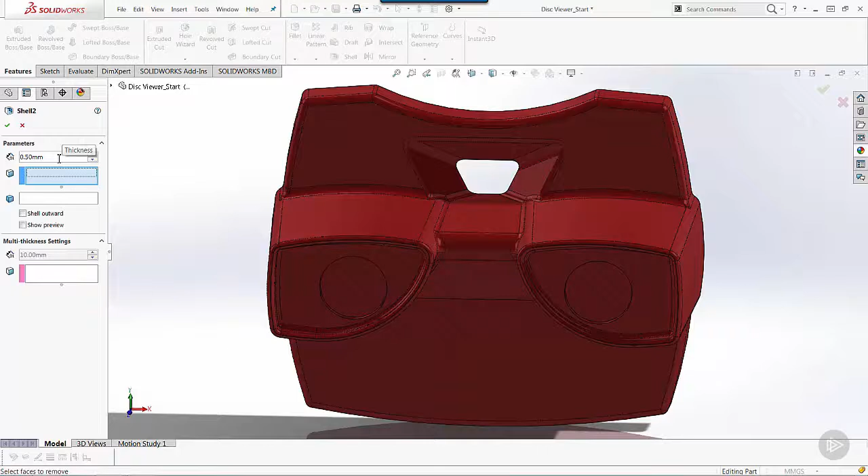Any faces that we select in this box are going to be removed, and then the wall thickness is applied. We do have the ability to set multiple thicknesses, meaning that we can specify individual faces and determine their thickness individually. But we want to stay with our standard half millimeter thickness, and we want to specify that these two faces are removed, and then the entire back face is to be removed.

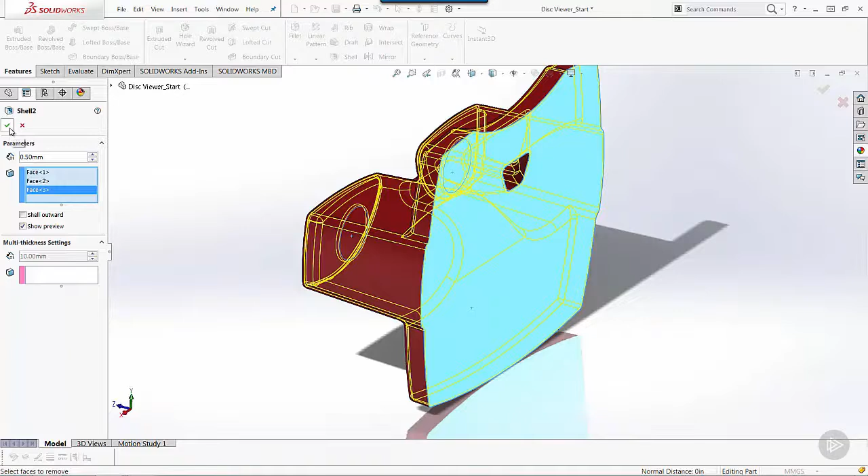We can choose the show preview. It's going to do a little calculation, and whenever we see our yellow preview, that lets us know that we're going to be able to get a result out of that. If you don't see the preview, it means you've probably got something too thick. Fillets are not quite large enough. There's something that needs to be modified in order for that to work.

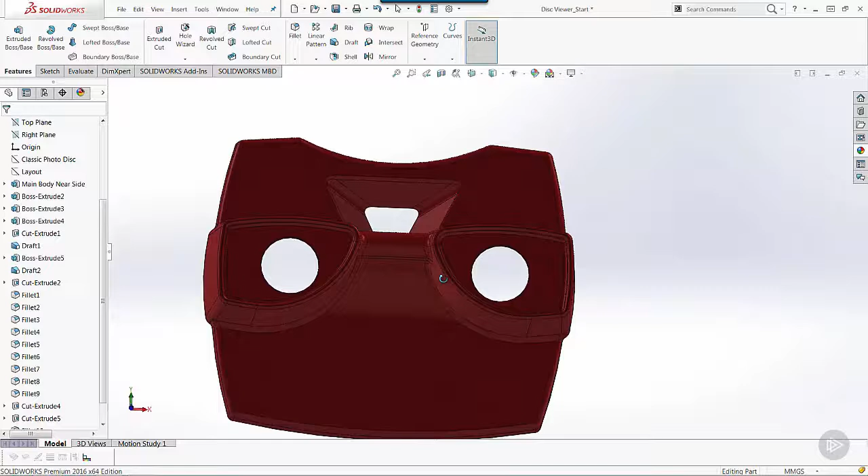And you can see very quickly I'm able to take that geometry and hollow that out or shell our surface in order to give us the plastic injection molding shape that we want. Very, very cool feature, but you do have to have pretty clean geometry. You can have problems with having surfaces that intersect one another and don't allow for that offset. It's basically an offset of all those surfaces that we did not select.

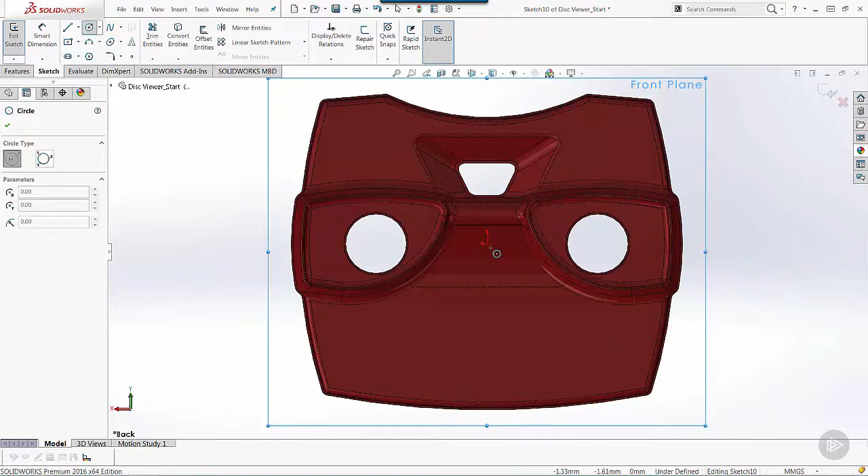Now that we've got that, I want to come in to the back view. Use Control 2 to get to a back. I want to sketch in a circle that's going to be a mounting area for our slider or our advancer that's part of that disc viewer. And so right there on the front plane, I want to create a circle right at the origin. Give that a dimension of 20 millimeters. And then I'm going to do an extrusion on that.

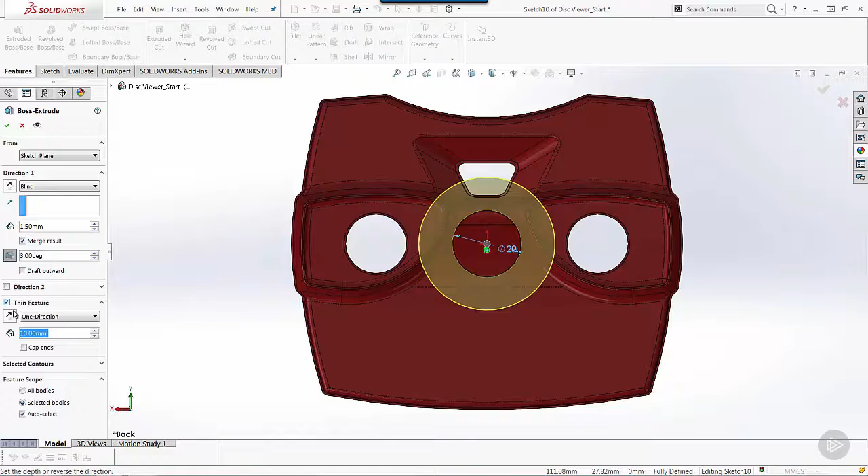We want to set our extrusion draft at 3 degrees. And then I want to specify this to be a thin feature, and I'm going to give that our same half millimeter thickness. Make sure that it's extruding in the right direction. And I'm going to use the up to next extrusion end condition, and that'll allow that to go and blend in where we need it to be. We also can choose the draft outward, which is going to allow it to create exactly the feature that we need.

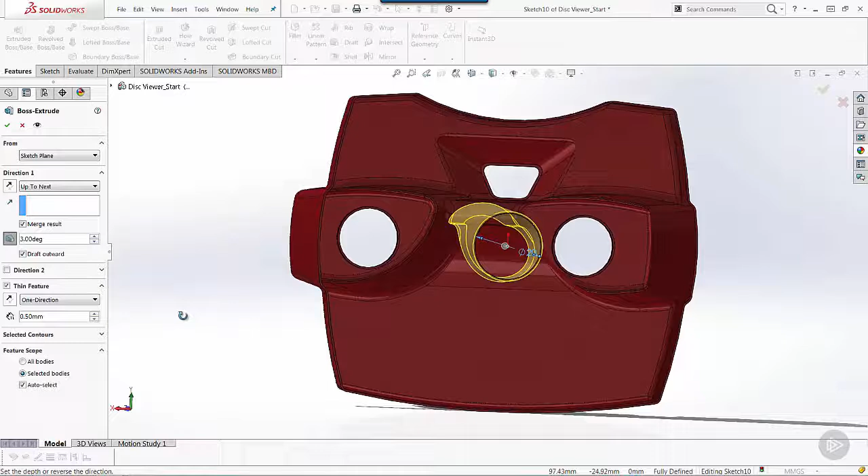So now you can see I get a little circular boss that's in there that starts at a half millimeter, and gets thicker as it goes. If you know anything about plastics or SolidWorks Plastics, we might need to run an analysis on this, but because of that 3 degrees, it's going to get pretty thick down there right as it hits the bridge.

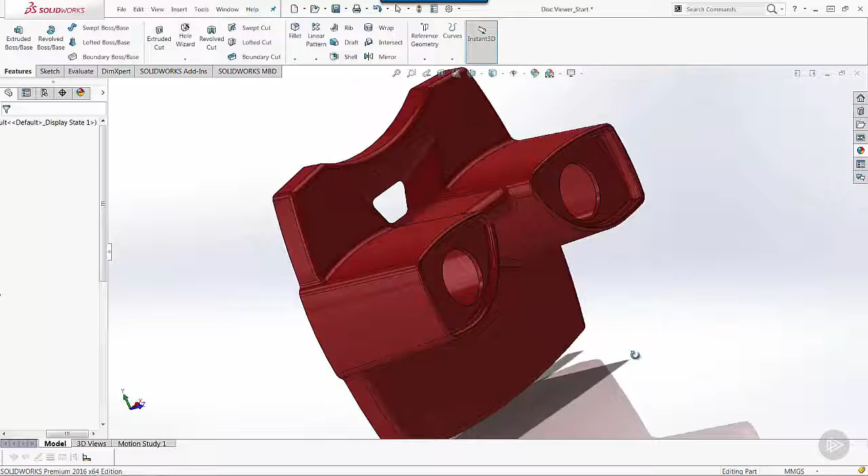That might cause a heat sink or an imperfection whenever we get to actually doing a plastics analysis on this and understanding what having that extra material is going to do to the cooling rate and the shrinkage of that part. But since we're working on the lesson of building geometry, let's stick to that, and we'll pick up our plastics analysis at another time.

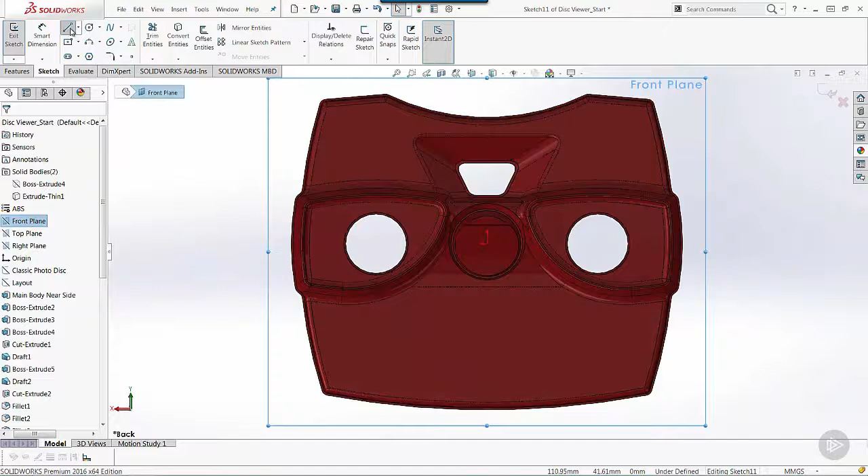So one of the things that we want to do here is create a couple of stiffening ribs that are going to go along here. And so I'm going to use that same front plane that we've been working with all along and start another sketch. And one of the neat things about using the rib tool is I don't have to be exact. Let me get a center line in here based off the origin, so that way I can do a little mirroring. Again, I like to pre-select. If you pre-select the center line and your entities and choose mirror, it doesn't ask you which one's which. It just takes care of it for you.

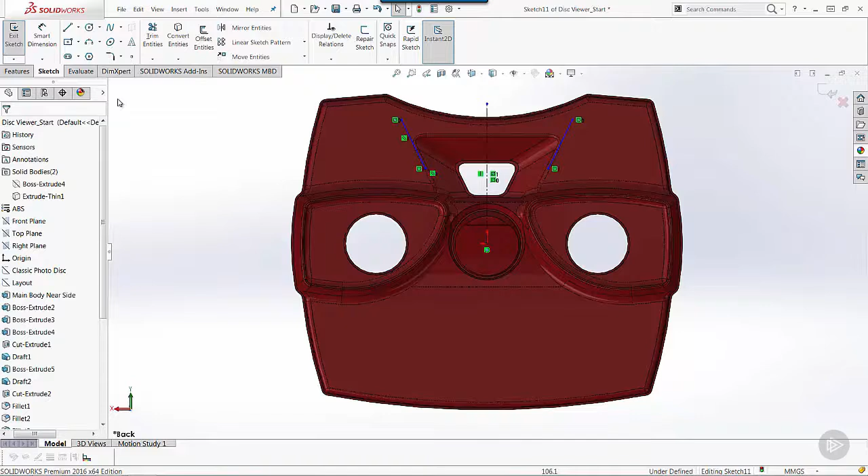I also want to specify that edge and that line are going to be parallel to one another. It's better to do the relationship before you do the dimension. Otherwise, it's going to think that you're trying to do an angle dimension. So put that at 0.5, and that gets it in the direction that I want it to be. And we can look at this.

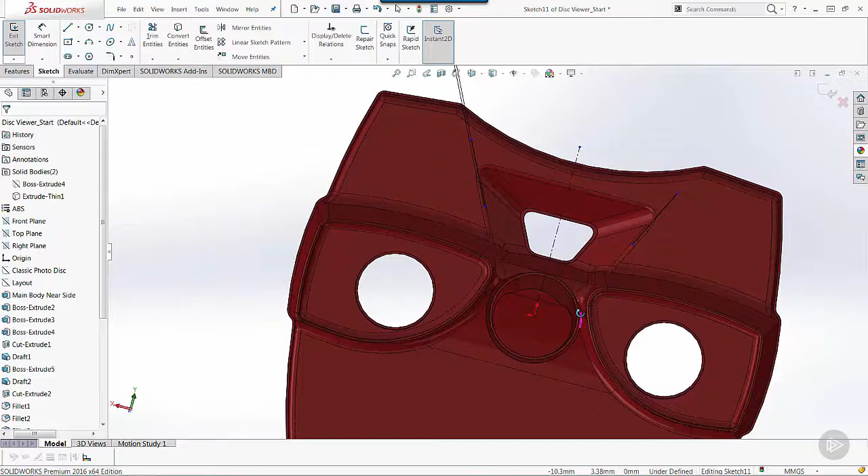So most of the time when we're in here talking about these things, we're trying to get you to fully define all of your geometry. But rib is one of the features where we don't have to fully define it. And what I mean by that is these endpoints don't need to contact any of the geometry. And the reason why is the rib tool is going to go up to next in 2 directions. It's going to go up to next down into our shell, but then it's also going to extend itself until it reaches another wall.

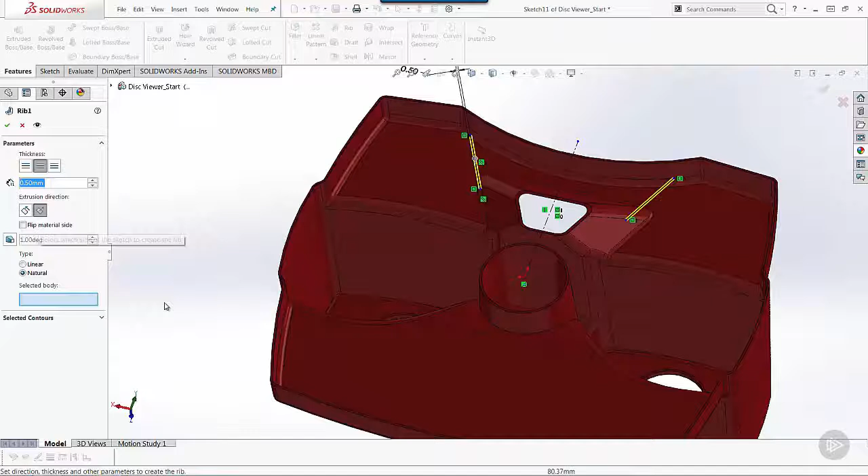So our rib tool is found under the features toolbar, and you'll see whenever we've got this kind of sketch, there's a lot of things that are grayed out and not available to us. But that rib tool that sits right in the middle of the modify area of the features toolbar allows us to come in here and specify, say, 0.5mm thickness, and we can specify the direction that we want this to go. Notice the arrows going up. We want to flip the direction, have that go back down into our shell.

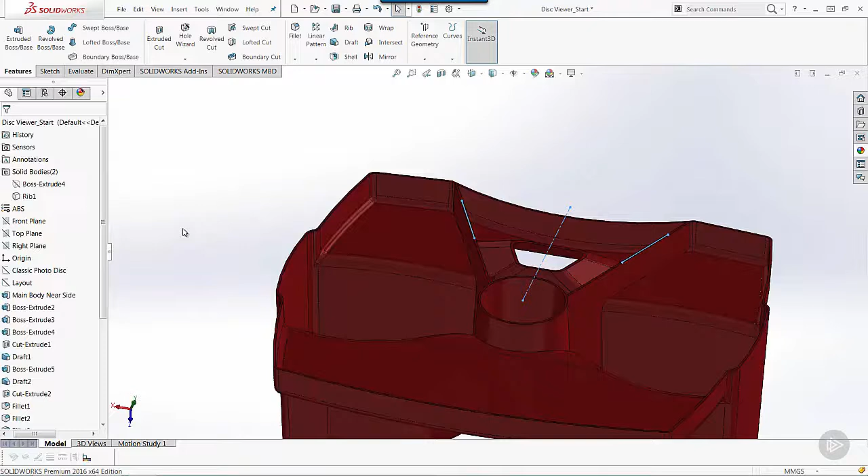We can specify draft angle. It by default is going to be outward, and then we can choose which body we want that to affect. Click on the green check mark, and you're going to see now that we created stiffening ribs in here very quickly, very easily, and it uses the up to next feature.

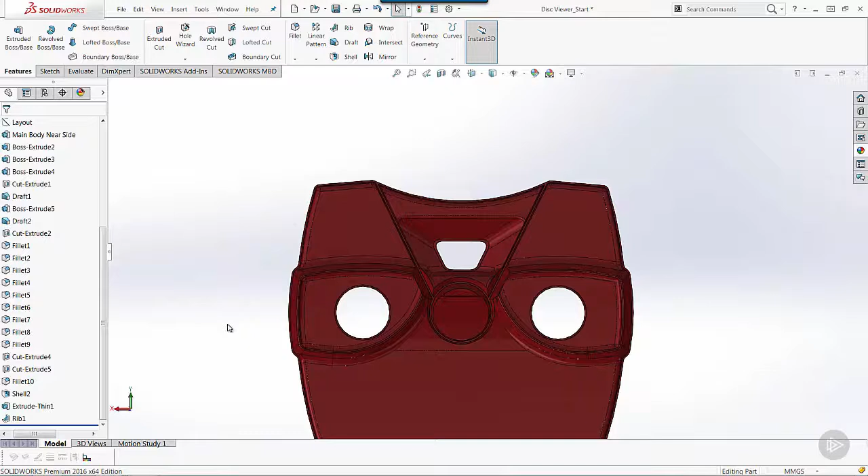Now, one of the things I told you earlier is we try to keep a very consistent draft angle. But it's pretty obvious to me, especially after getting the rib feature in there, that 3 degrees is just too much for the last 2 features that I created. So let's come in here and select those and make a design change. Let's drop those down to 1 degree. That's something that's going to be a little bit more reasonable for this type of geometry and not create too much thickness in our features.